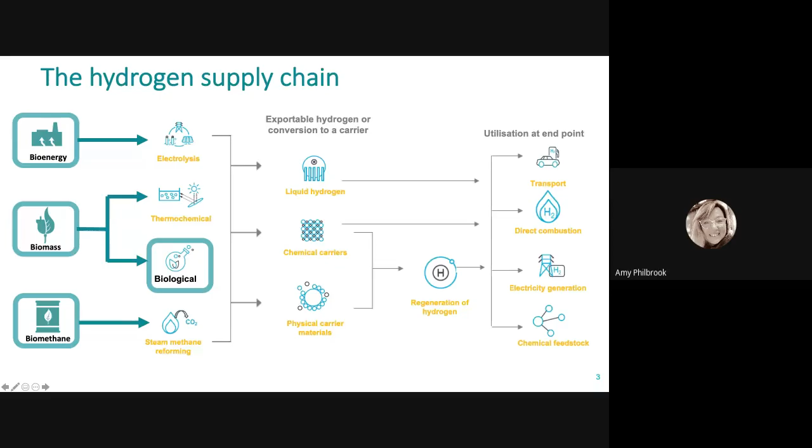Great, thanks Amy for that intro. Now let me execute this screen sharing move, which we've practiced three times, and it's worked every time. How are we going, Amy? That look all right? Yeah, that looks great, Daniel.

Okay good, so look, thanks again. I'm the director of the Hydrogen Energy Systems Future Science Platform here at CSIRO, which is an initiative really aimed at ensuring that this emerging hydrogen industry has the breadth of technologies available and the scientific capabilities available, really to ensure its success.

And we've been working now for about 3 years, and there's really interesting outcomes from some of that work in terms of potential step change technologies, which I'll talk a little bit about. As well as the leader of the FSP, I'm also a researcher and scientist with a lot of experience in gasification and combustion of things.

And that, of course, offers another pathway for biomass to contribute to this hydrogen story, which is another aspect of what I'm going to be talking about today. In that capacity, I sit on, I'm the Australian lead on one of the tasks, Task 33, for the IEA Bioenergy, a bit like what Amy does with her task. That's a really important process for us, linking into some of the global best practice in this space.

This is my version of Amy's hydrogen pathways slide, and anyone that's seen me speak about hydrogen will have seen me put this up. I'm not going to go through it in a lot of detail. I think the point is there are lots of ways of making hydrogen, lots of ways of making renewable hydrogen. And once we've made that hydrogen, there are many, many things that we can be doing with it, both domestically in terms of decarbonisation of a whole range of different sectors. This isn't just about transport or electricity. This is much broader than that. But there's also the renewable energy export industry vision. And I think the take-home message for me is that once we can make this hydrogen, it doesn't care where it's come from, we can use it for lots and lots of things.

A week doesn't go by now where we don't see new examples of projects being either planned or delivered, which are all around making low emissions hydrogen at scale. And the team at ARENA has really played a significant role in advancing a lot of those projects. So kudos to them.

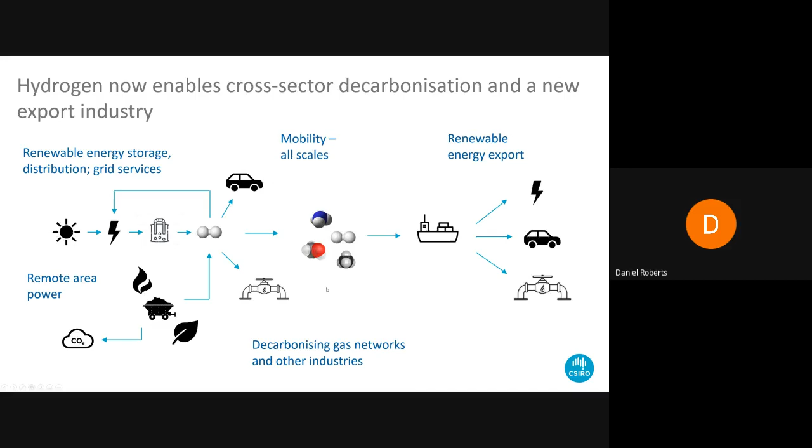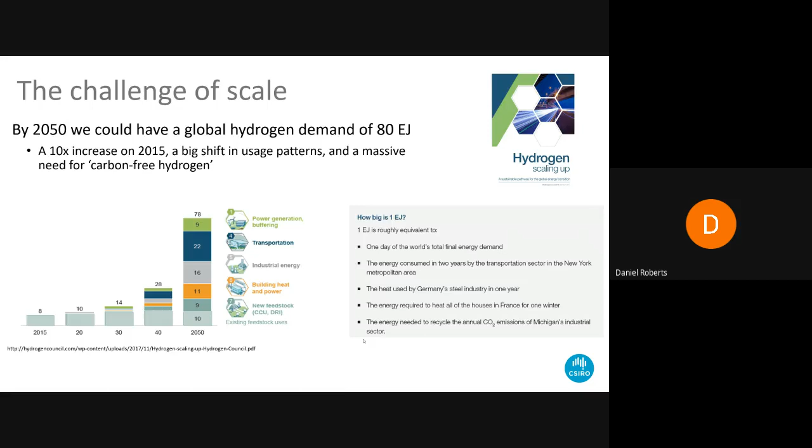Scale, though, is key. This is one projection of just how much hydrogen we can expect to participate in the global hydrogen industry in the next 30 years or so. It's a big projection, but nonetheless, it shows that a lot of hydrogen is going to be used and transported around the world for a lot of new applications. And most people, when they consider the scale here, appreciate that we're going to need a lot more than renewable electricity and electrolysis, both for making the volumes of hydrogen that we need, but also for getting the benefits that we hope to achieve by linking hydrogen production and use across sectors. And I think that's really a role that biomass and bioenergy can play in supporting this emerging hydrogen industry.

Now, I've only got 10 minutes or so, so I don't want to dwell too long on the background. There's two parts to what I want to talk about today. I'm here to talk about what we're doing at CSIRO in this space, and there's two angles there. One is the thermochemical work, the gasification-based work that Amy referred to, and that's something that we've been doing for a long time and have a considerable amount of experience in with a whole range of different feedstocks, frankly. The other angle is some of the more emerging, interesting projects that are coming out of the Future Science platform that I run. And that's some of the biological and enzymatic pathways, which I know a lot less about, but I'm really quite excited by the prospects of.

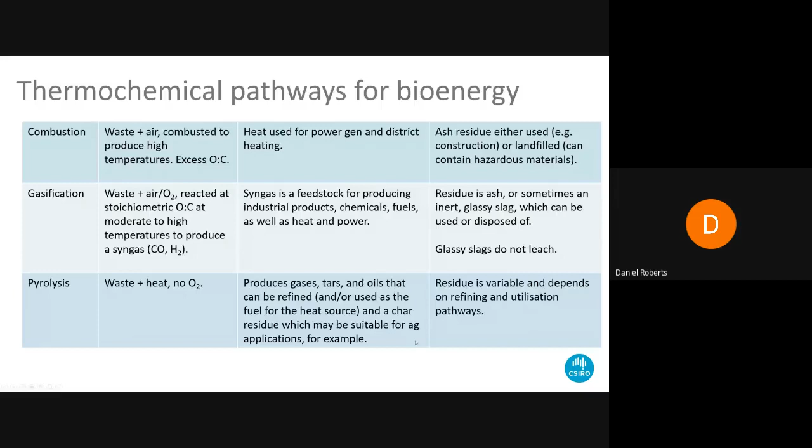So when we talk about thermochemical pathways in a broader bioenergy context, we usually talk about combustion, gasification, pyrolysis, really in the notion of, well, for our work in biomass and waste to hydrogen is really focused on the gasification pathway. That's largely because of our experience in the gasification process, our capabilities in syngas processing and utilization, but also because of the flexibility of syngas. I mean, almost all of the hydrogen used industrially at the moment comes from syngas, which is made from either coal or natural gas. And so using biomass and waste feedstocks to produce a syngas offers a really good pathway for biomass to participate, with the challenge being around gasifying the biomass and waste effectively at scale and producing a syngas that can then be used.

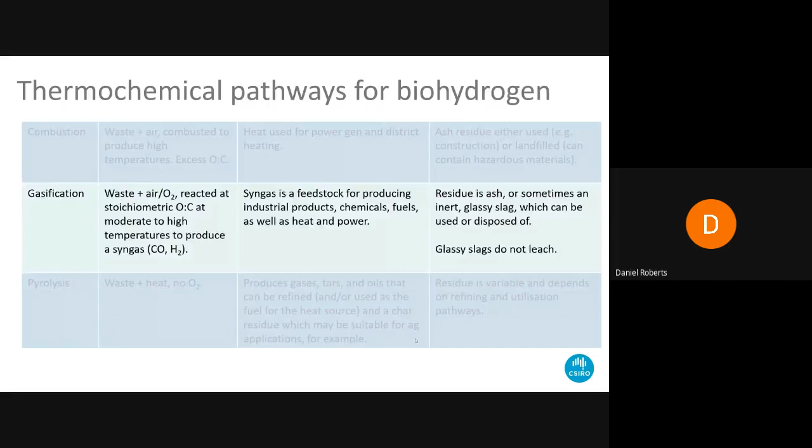We've been gasifying things for a long time. Large-scale coal to chemicals, fertilizers, power, gas, and hydrogen has been going on for hundreds of years. The fertilizers and chemicals made from hydrogen nowadays come from coal gasification or natural gas reforming. We also have a lot of experience with biomass gasification, mainly at small scale for power generation.

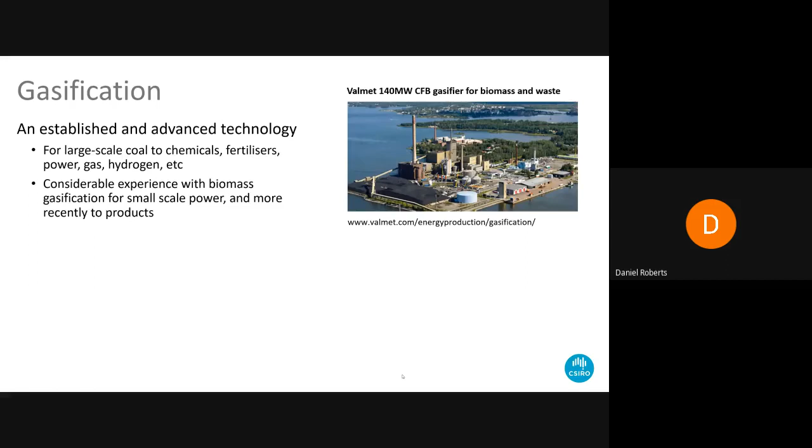As the world becomes more interested in other products, there's more interest in these gasification pathways due to their flexibility. When we consider waste, there's much less experience with waste gasification for syngas and other products.

There are lots of concepts out there, lots of demonstrations, some good technical success, I think, is probably where I'd put this. Some challenges with project economics have been well documented, in particular for the example I've put here. But that's not surprising for early stage, first generation approaches.

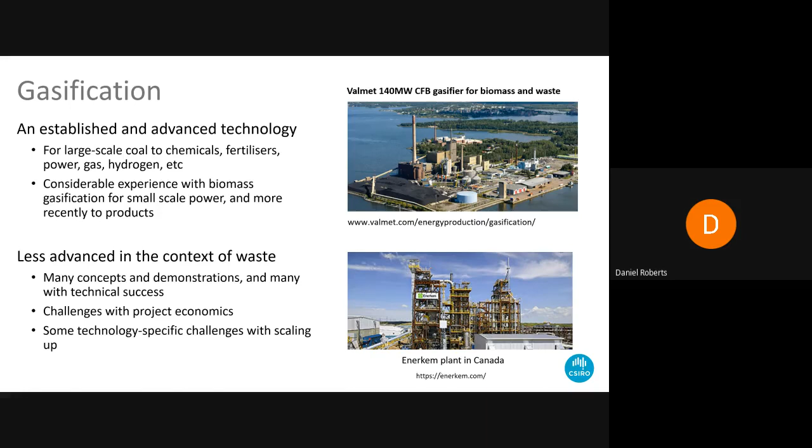When we get better at scaling up some of these technologies and do a bit more work, motivated by the need for circular economy principles and other drivers, these technical demonstrations will be a lot more successful.

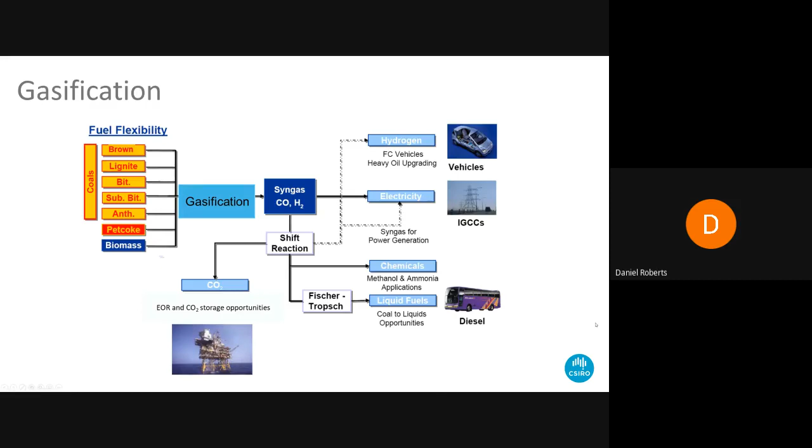The work we do here at CSIRO is focused around our research scale biomass gasifier, nominally designed for around 50 kilos an hour of dense biomass, but being a research facility and being researchers, we do tend to push that a little bit to see what we can come up with. It's a fixed bed style gasifier, so it's well suited to dense materials, and we partner with research institutes from around the world if we need to diversify our technology.

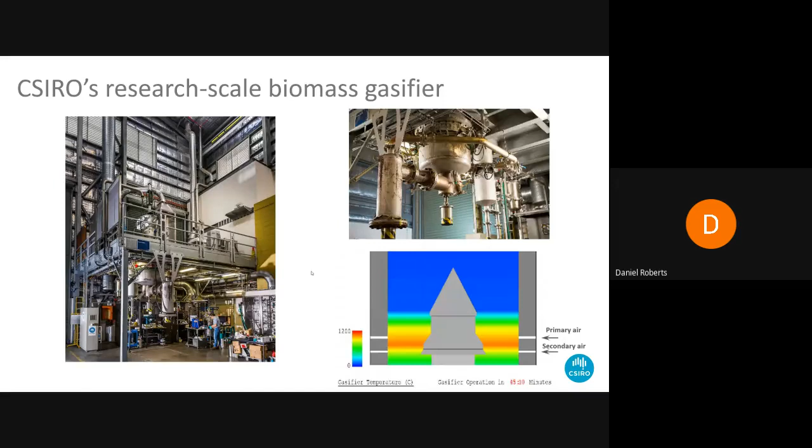Supporting this gasifier is a whole range of laboratory equipment and facilities which give us detailed insights into what goes on inside the gasifier, detailed characterizations of the syngas and tar that comes out of it, which is critical to support the syngas to hydrogen pathways that we're now starting to seek to demonstrate.

I'm rushing through this, I know - trying to keep within the time. I'm more than happy to talk about any of these aspects either at the end or afterwards if you want to get in touch.

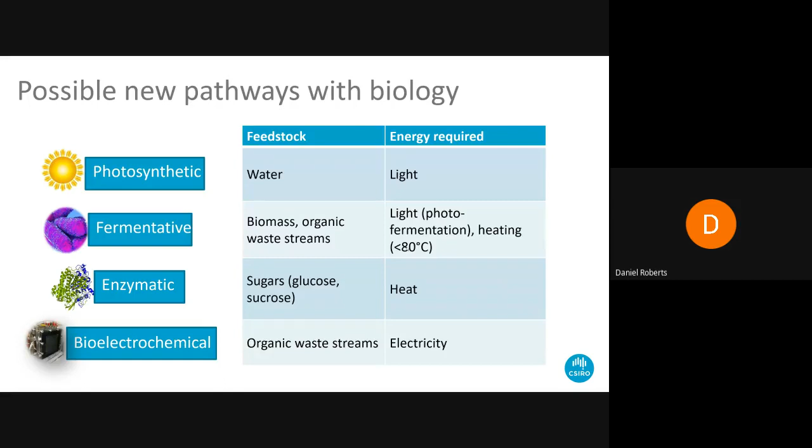That's really quite attractive, I think, as we start to look for a whole range of different applications of these types of technologies. My next two slides are examples of projects we're working on in my FSP.

This has got a whole range of applications - we're talking to people now about using this in the wastewater management space. And I think getting this diversity of feedstocks working in this process via the use of some thermal pretreatment is a big part of making this work.

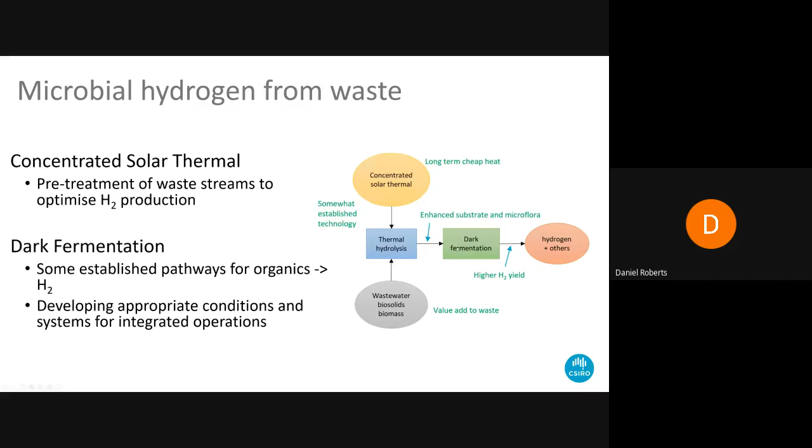So that's quite interesting. Now, this is one of my favourite projects at the moment, and it's because it wouldn't have happened, I don't think, without this notion of a future science platform.

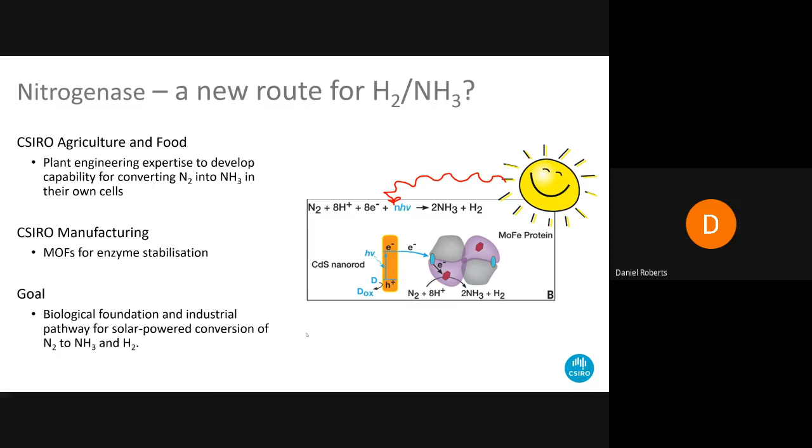It's not specifically around converting biomass into hydrogen, but it's good enough to put on here anyway. It's around taking biologically inspired materials, these nitrogenase enzymes which plants use to fix nitrogen, and making those industry-proof. What that will lead to is a process for solar power conversion of nitrogen in air to ammonia and hydrogen under ambient conditions. That really is a game changer, and the work we're doing is showing it's possible. It will work at small scale, and we can now begin to think about how we might make this happen at a larger scale.

So that's my 10 and a bit minutes - a really quick overview of CSIRO's work in thermochemical and biological pathways for hydrogen production from biomass and waste. My contact details are there if you'd like to follow up with anything. But for now, Amy, I'll send it back to you.

Okay, Cara, can you see my screen? Or Amy? Yes, it's showing nicely. Excellent, very good.

Well, thank you everyone for the opportunity to talk this morning, and thanks to Bioenergy Australia for providing Helmont Energy the chance to talk about biomethane. It's great to hear Daniel talk about the different technologies emerging to create hydrogen, and today what I'd like to do is focus on one of those technologies, which is biomethane.

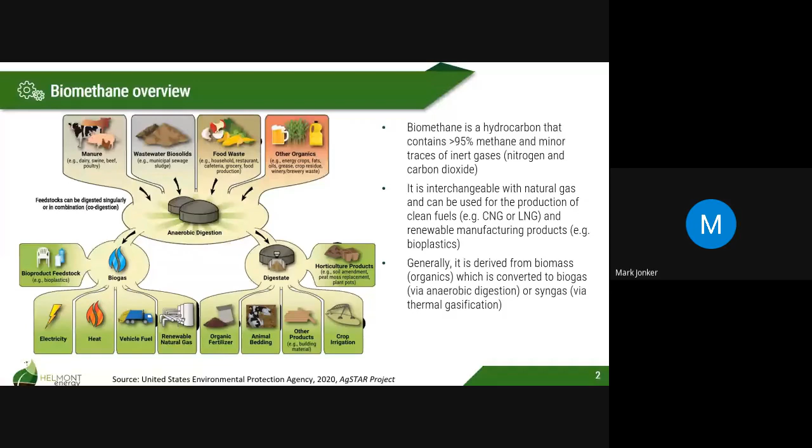Biomethane is produced from a variety of feedstocks and can be converted into a variety of energy products to meet our energy needs. As an example, biomethane can be stored in the natural gas grid, and it can be used within peaking power stations to firm up our intermittent renewables. It can also be converted into vehicle fuel and used to decarbonise the transport sector.

And I've got some slides in this pack that show just what's happening in our markets. And of course, it can be delivered to any gas consumer connected to the gas grid and used to decarbonise the energy supply. Because biomethane is interchangeable with natural gas, it means we don't need to upgrade our gas grid or our gas appliances to use this zero emissions gas. This gives biomethane the ability to do the heavy lifting that is required now by our next wave of clean energy technologies.

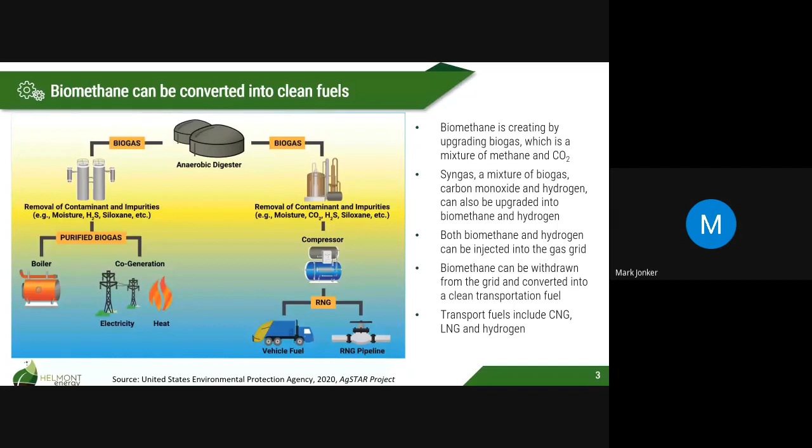In Australia, we've got a large supply of organic waste resources that could be converted into a biomethane resource. Most of you may have seen the Deloitte Access Economics study completed in 2018, which identified 371 petajoules per annum of recurring biogas resources. To put that in perspective, that's enough gas to meet 80% of the domestic East Coast gas demand. The waste is largely derived from our agricultural areas and our cities, which produce municipal solid waste. Currently, this waste goes to landfill, is stored in large lagoons, in some cases incinerated, and it's also returned to cropping lands as organic material.

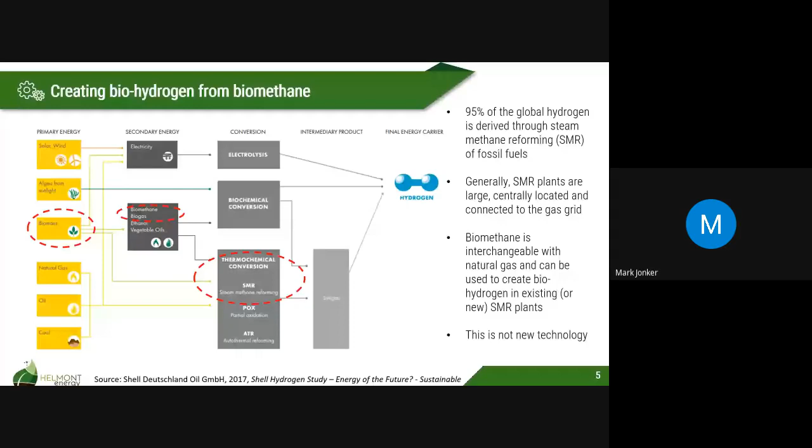But if we're going to do that, we're going to need to create a biomethane supply chain. The good news is that our international trading partners across North America, Europe, and the UK are already doing this. They are developing biomethane projects that decarbonise the gas grid, and those projects supply green gas to secondary processes such as CNG, LNG. There are a small number of biohydrogen processes, and those secondary processes provide fuel to the transport industry.

In the US, as an example, they're operating 129 plants and supplying 57 PJs into the natural gas grid. To put that in perspective, that's around 12 to 15% of our East Coast gas demand. The green gas is largely serving the transportation industry and being used in heavy vehicles across the US and Canada.

So if you've been to the US, you might have noticed that the back of the semi-trailers and the prime movers have CNG tanks which are used to fuel those trucks. Those CNG tanks contain renewable natural gas. The situation in Europe and the UK is similar, with over 500 plants supplying biomethane.

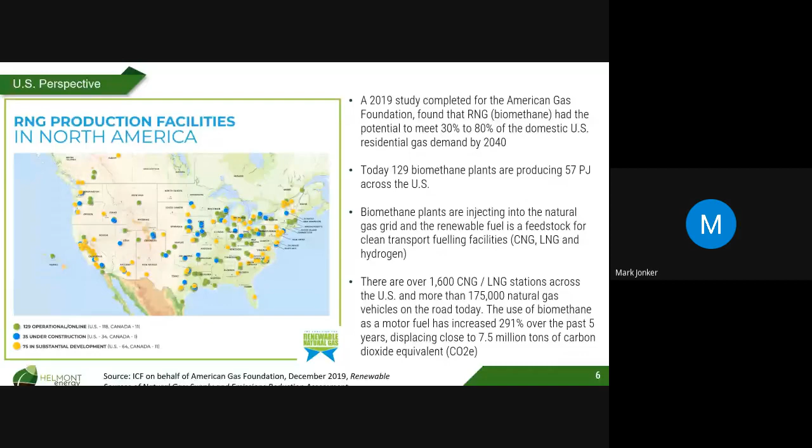To do that, we need to make 3 changes to policy. Firstly, we need a policy instrument that will encourage the uptake of biomethane in either the gas grid or the clean fuels market. We're pretty lucky, we already have an emissions reduction fund, and that fund could support biomethane or biohydrogen by the creation of carbon credits. Those carbon credits, or ACCUs, can be valued by investors, helping underpin capital required for new biomethane and biohydrogen projects. Equally, we could introduce a green gas target, which would set volume targets on green gas production. This would be similar to the RET, or the renewable energy target, which has successfully delivered material amounts of utility scale renewable electricity into the market.

Secondly, we need to give the market the confidence that when they are buying the product, it creates credible, internationally recognisable emissions abatement. To do this, we need to make some minor tweaks to our existing emissions reporting standard, called the NGER measurement determination, which unfortunately doesn't recognise green hydrogen or biomethane as a zero emissions fuel when delivered through a multi-user gas network.

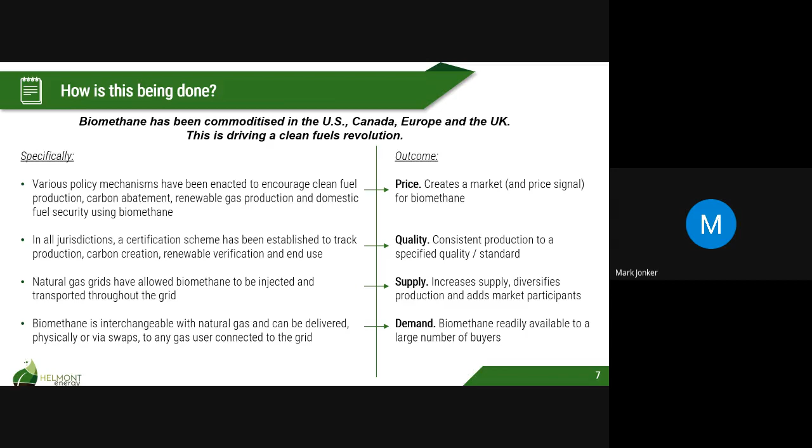Thirdly, our natural gas grids have a really important role to play. Like the national electricity market, their role is to connect renewable producers to consumers of renewable energy. Fortunately, there are proven models on how to do this in overseas markets.

However, in Australia, currently when a biomethane producer injects green gas into the gas grid, it loses its environmental properties and cannot be recognised as a green gas by the consumer purchasing that gas. That means a consumer does not get the ability to reduce their reportable emissions under our national emissions accounting methods, which is called the NGERs.

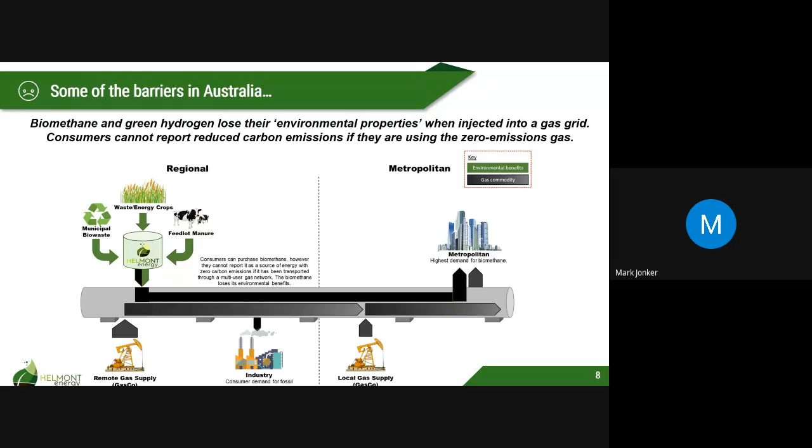The key is to be able to inject biomethane into the gas grid, consolidate the supply of biomethane plants, and then withdraw biomethane at dedicated green gas consumers or secondary clean fuel processes such as biohydrogen.

On this slide here, I've tried to capture the changes that we would need. I'm trying to show that the gas grid represents a pool similar to the NEM, and one biomethane molecule injected can be withdrawn anywhere within that pool. In this case, the pool is the pipeline.

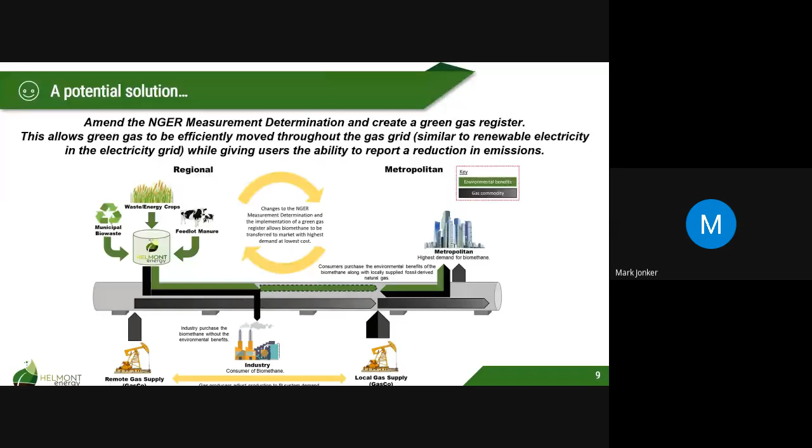If we can deliver on these policy changes, we'll unlock the 371 PJs of biomethane potential. We'll start to decarbonise our natural gas grids, and we'll spur on new investment in clean fuel technologies such as biohydrogen, which can be delivered using proven large-scale production technology, such as steam methane reforming, or even the Hazer process, which I'm looking forward to hearing more about in this webinar.

Importantly, we give our regions jobs, and this is really important for our economy as we look to recover from COVID-19. And we reduce waste by creating a circular economy where waste is converted into electricity. But of course, the key to all of this is attracting investment, and we'll only achieve that if we value the carbon abatement or green attributes of biomethane and biohydrogen.

Now, I've had a go at working out the full carbon value of biohydrogen, and I caution you that this is hot off the press, and so no doubt there'll be some tweaks to these calculations as this evolves. My infographic on slide 11 attempts to simplify all the various components of the biohydrogen equation.

And in this example, I'm assuming organic waste is used to produce biomethane. The digestate, which is a byproduct of the process, is returned as a carbon soil improver, which offsets synthetic fossil fuel derived fertiliser, and the biomethane is used to produce hydrogen, which is then used as a vehicle application or exported overseas.

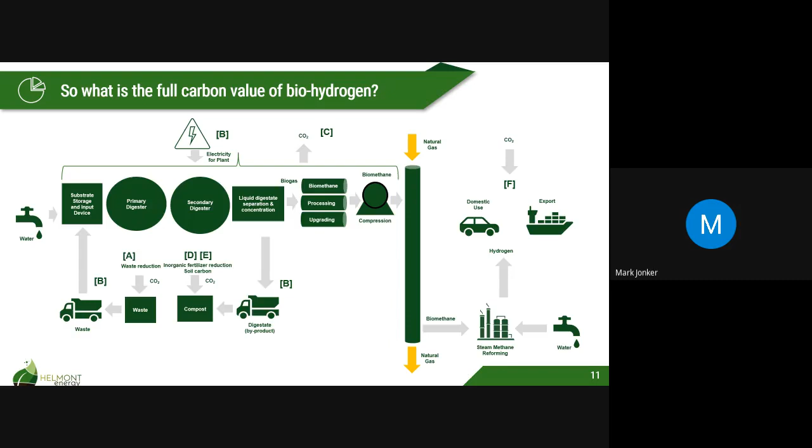What my calculations show is that biohydrogen has the potential to create or abate 0.124 tonnes of CO2 per kilogram of hydrogen. What that means is that for every kilogram of hydrogen used, 124 kilograms of CO2 can be abated from the atmosphere.

Now, I agree that seems like a really large number, but that's the thing with biomethane. It has some unique benefits which other technologies cannot bring to the hydrogen sector. It creates substantial carbon abatement because it not only eliminates tailpipe emissions, it also avoids fugitive emissions by utilising waste. These environmentally damaging waste emissions have a global warming impact of 28 times that of CO2. And obviously it has the potential to sequester carbon back into the soil and offset fossil fuel derived fertiliser.

From a financial perspective, this level of carbon abatement could create around $2.50 per kilogram of hydrogen of incremental value. Now that assumes you can realise a $20 price for the carbon abatement. That's not a bad kicker if you're targeting a $2 per kilogram hydrogen price from domestic and international buyers.

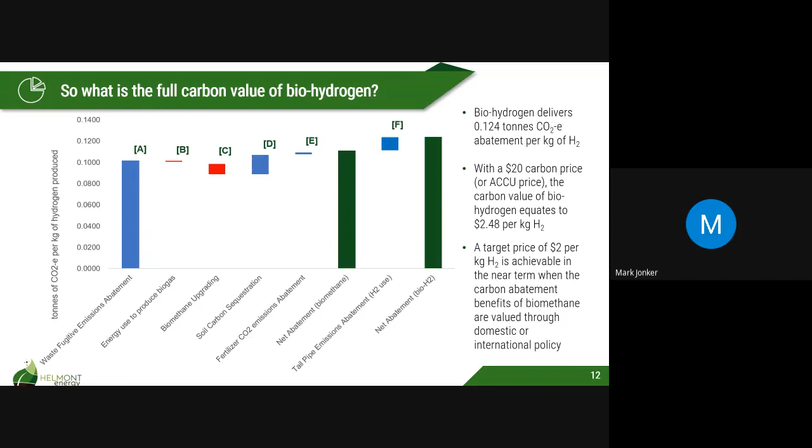So to summarise, we can produce hydrogen from biomethane. We can do it using technologies, and we can do it at a large scale. Our gas grids have a really important role to play in delivering our biomethane to our centralised clean fuel technologies.

Hydrogen produced using electrolyzers also has an important role to play for our future export industries. We have an abundance of sunshine, which gives us a competitive advantage to other countries. However, electrolyzers are currently expensive, and at a large scale, we need to redirect scarce water resources to produce hydrogen. There is no doubt that we'll solve those problems and lead the world in years to come.

But perhaps in the meantime, we should make use of the bioenergy resource at our fingertips. We can create it in our regional areas and deliver it centrally to large-scale hydrogen facilities connected to our gas grids. We can use our existing infrastructure and participate on a global stage using biomethane that delivers material carbon abatement to our domestic economy.

But to get things moving, we need to make some simple changes. We need to recognise biomethane and hydrogen as a zero emissions fuel when delivered in a multi-user gas network. We need to value the green and carbon attributes of the product. We need to enable our gas grids to deliver and receive the product across the gas network. And finally, we need to work with our existing grants programs to kick-start the industry, which will attract investors and expertise into our domestic market.

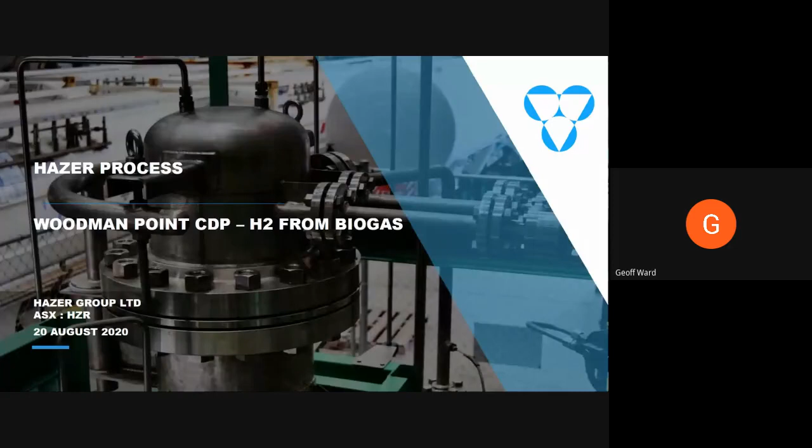If that's the biggest glitch we have, then we've done well. As we go through this, I'd like to think this is an example of many of the things that Mark was talking about. I'd actually endorse nearly all of Mark's comments. There's a couple where I'll show some very similar figures that we've looked at in detail on the carbon abatement potential of the Hazer process. It's been an issue that we've been quietly working on. I'm a little bit torn between being pleased to see that other people are twigging to its value, and disappointed that it will probably bring a number of competitors into what we think is a really unique market niche.

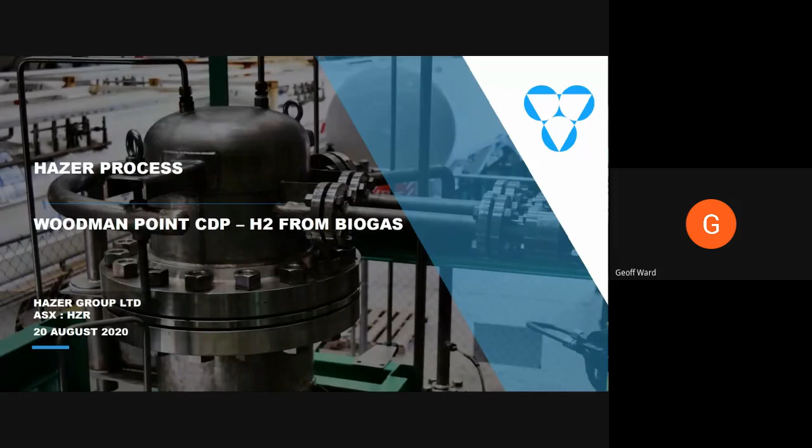Let me just see how this works. All right, great. So what is the Hazer process? Hazer is a listed company. Our ASX ticker is HZR, easy to remember for Hazer.

It's fairly easy for any of you who have follow-up questions or want more information to go looking through our quarterly reports, through our investor presentations, and we also have a number of videos that animate our technology.

We are one of the thermochemical technologies that Dan mentioned. We're not a gasification technology. We would be classified in that third tranche that he described as pyrolysis. In our process, we take a methane feedstock. We'll also work on a mixture of methane and ethane similar to an LNG or natural gas, but ideally the process was initially designed around methane.

We react that methane in a fluidized bed or a paddle tube reactor, two fairly standard, well-tried conventional designs for chemical reactors, in the presence of an iron ore process catalyst, which is a sacrificial once-through catalyst. We break that methane, which has the chemical composition of CH4, down into two hydrogen molecules and a particle of solid graphite, which aggregates into a range of carbon shapes. The more technical word is morphologies - carbon micro shells, carbon micro onions, and carbon nanotubes.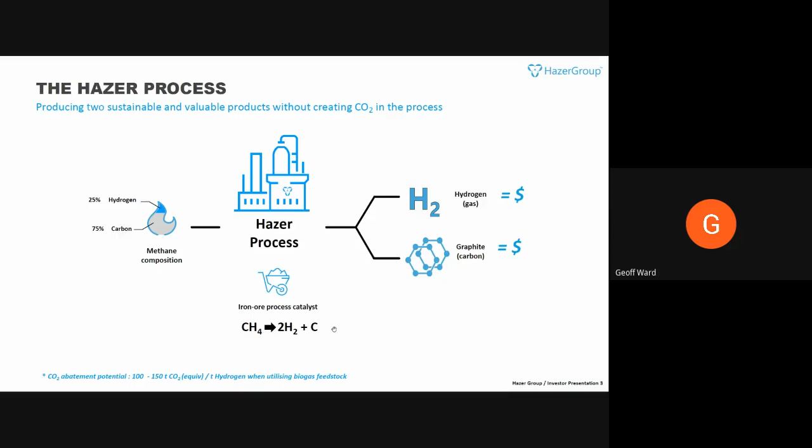So the company started off very much as a technology-driven company, but we also think you need in any emerging market innovation in how you look to enter the markets commercially. That's led us to focus closely on the sustainability aspects of our process, and in particular how we could focus not so much on meeting the demand people talk about in 2030 or 2040 for 500,000 tonne or 1 million tonne capacities and large import and export chains, but on what's happening in the hydrogen market now.

As we transition from a very small niche market where hydrogen is typically used in universities, hospitals, specialist applications, or in oil refining, petrochemical manufacture and glass manufacture—so you've got two completely different markets—what's emerging in the middle is this large market for transport, energy, and decarbonisation purposes that both Dan and Mark have talked about.

What we recognised was that economies very focused on the hydrogen transition—parts of Northern Europe, Korea, Japan, California—as they're getting going, they're getting going at small scale. So we saw a great opportunity to bring an innovative commercial model to the table, where we look to use available local biogas—primarily from wastewater treatment plants or landfills in Australia, or from large agricultural waste stations, maybe in the US or Europe.

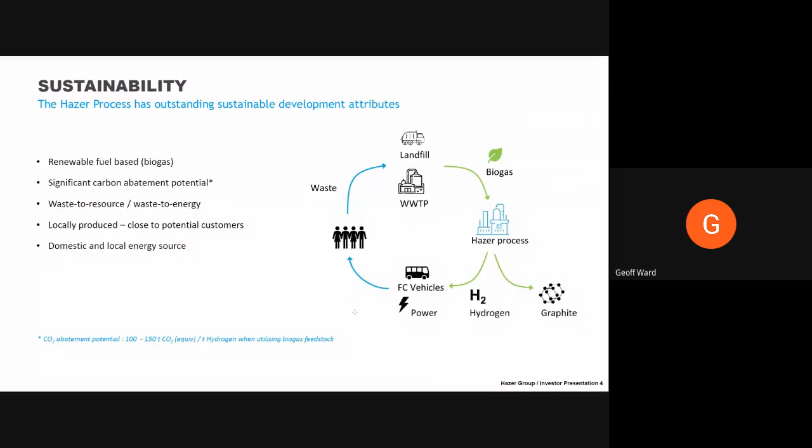And we think the Hazer process can bring that—both a solution for upgrading civic infrastructure, a supply of low emission hydrogen, and a stimulus for the local economy—a classic example of circular economy and sustainable thinking.

We're very proud to announce just last month, with the support of ARENA, and in fact Amy and I worked directly on this project through the due diligence and negotiation phases, that we have reached financial close and made a final investment decision. The board approved going ahead with construction of the first large-scale, fully operational, fully integrated example of the Hazer process.

Through the early parts of 2019, we engaged with Water Corporation. They're the government-owned enterprise that operates the sewerage and water supply system in Western Australia, and they operate major wastewater treatment plants to the north and south of Perth.

We've entered into an arrangement with Water Corporation where we will buy biogas from their existing anaerobic digestion units. The gas is currently partly being flared, partly used for power generation. We will buy some of that flared gas and convert it into hydrogen and graphite through a Hazer plant, which will be built co-located with the digesters on the Water Corporation site.

We want to acknowledge our gratitude and thanks to Water Corporation for collaborating with us on this. We think the fact that we've been able to work so effectively and so quickly with them is a real validation of that innovative market niche I spoke about on the last slide.

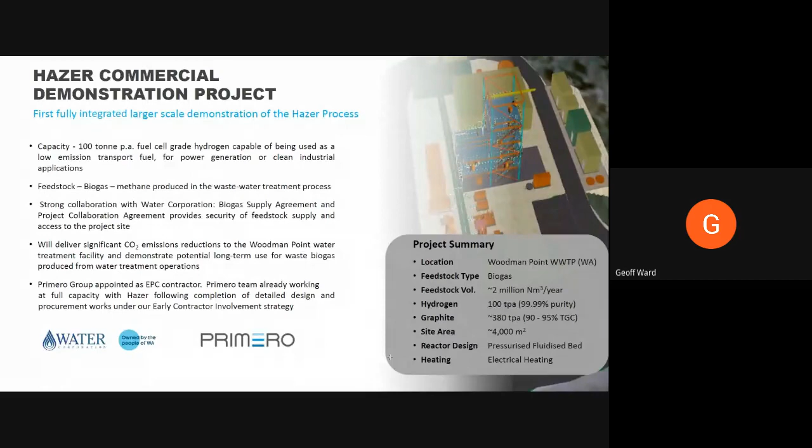Of the $17 million budget, around just slightly under $8 million will come through an ARENA grant in the capital phase. We'll have some further funding support through the operations phase, with the balance of funding supplied by my shareholders. We completed a capital raising in July this year to raise in total $9.4 million.

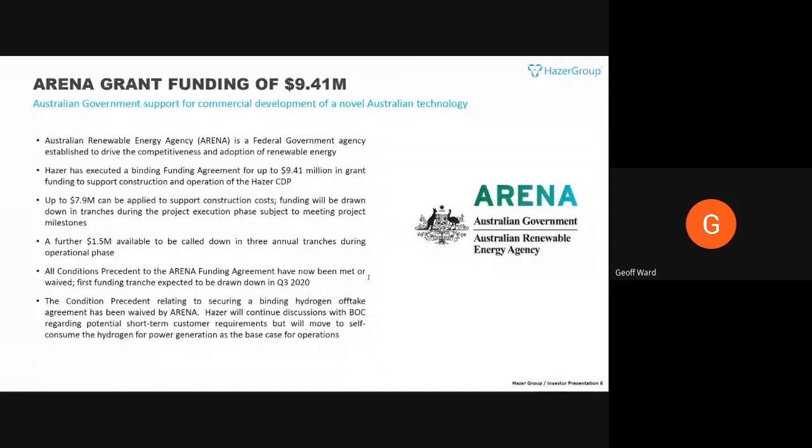I want to touch on one other point, which maybe illustrates a couple of ways in which the industry is developing, and also picks up some of the points that were in both Mark and Dan's infographics, which I thought were fairly illustrative.

As well as developing our commercial demonstration plant at Woodman Point, we also have just kicked off a feasibility study with the consulting group Aurecon and our study partners Macquarie Group and Hyzon Motors into establishing a renewable hydrogen refuelling hub in Mandurah.

Mandurah, for those not from the West, is a regional city approximately 100 kilometres south of Perth. The aim of the study is to aggregate what we see as quite strong early stage demand in that region, which could be supplied from an expanded Hazer process in the future or from renewable backed electrolysis.

This is showing what's starting to happen throughout the hydrogen industry in Australia. We're seeing production demonstration projects, such as our project or the Jemena project in West Sydney, also supported by ARENA, or the AGIG projects, the Australian Gas Infrastructure Group projects in Adelaide.

We're now also starting to see significant interest in hydrogen use projects. So we have the Mandurah refueling study we're doing. There was an announcement just this month about FMG, the large mining company, moving towards hydrogen buses for their Pilbara workforce. And there have also been announcements about establishing a fleet of hydrogen cars and a refueler in Western Sydney.

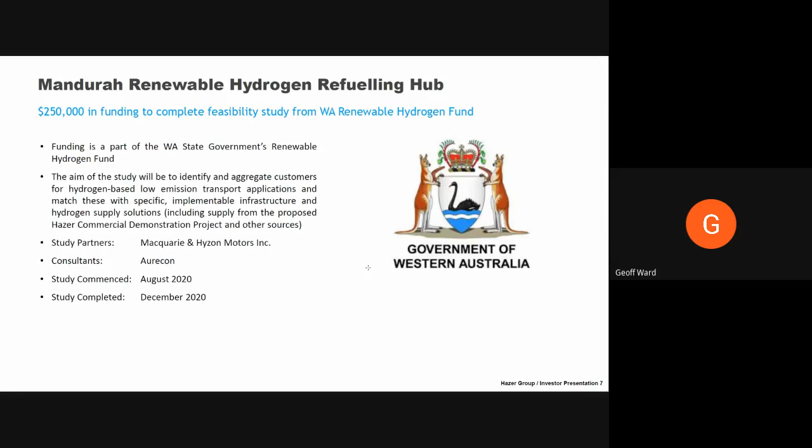So I might stop there. We're delighted to showcase this as a large-scale hydrogen project, but also as a really innovative bioenergy project. And I'll hand it back to Amy.